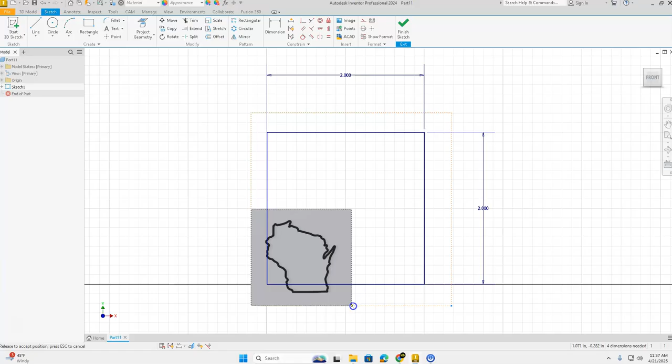Now my image is a little bit too small for my 2 inch by 2 inch area. In order to make it larger, I'm going to go to the bottom right hand corner, find the red dot, click and hold down with my mouse, and stretch this a little bit bigger. Once I get it enlarged, I can move it and shape it to the size that I want. Make sure when you're sizing this with the red dot that you're pulling straight out at a horizontal line. If you end up tipping, that's going to tip your graphic as well, and that's okay if that's what you want, but I'm going to make mine come out horizontal and keep the orientation straight up and down.

Next, I have this the size that I'm going to be tracing it, so this rectangle that we created, I'm going to right click and select delete. I could also click it and press delete with the keyboard. Either way is fine. I'm just going to get rid of that rectangle that we drew so it doesn't become confusing for us.

Now, in order to trace around the contour of my shape, I'm going to use a new tool for us, which is called a spline tool. I'm going to come up to my Create section in my ribbon bar, and underneath the line icon there's a line button. I'll click on the line button and go down to the second one down, which is Spline Control Vertex, and click to select it.

Before I start tracing, I want to use the zoom wheel on my mouse in order to enlarge this on my screen so that tracing is going to be a little easier for us.

Okay, that looks pretty good. Next, with my spline tool connected to my mouse, I'm going to start in one of the corners. I like starting in an outside corner or an inside corner, so I'm going to start down here in the bottom right, click, and come up around and start going around the contours.

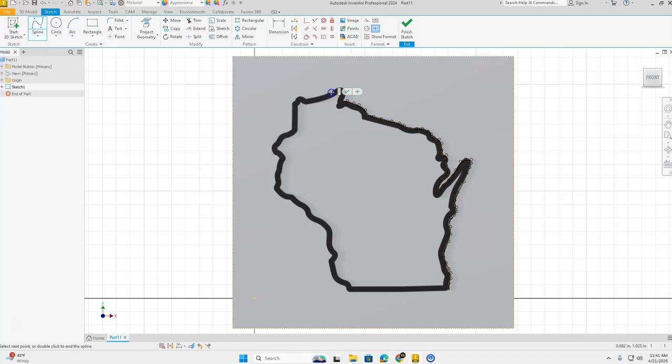Okay, it's just going to take us a second to go around this image. It's a lot of clicking, and looks like I'm going to have to start trying to move my little glyph that keeps following me around, and move him out of the way. He doesn't have to go far, just out of the way enough so we can find the next shape on our image in order to trace it.

Nope, gets in the way again. Not a big deal, just something we have to get used to. Mr. Bowen and I looked pretty hard and long to see if that was something we could make disappear or fade out after a little while, but this is the best we could come up with for you.

Keep moving him out of the way if he gets in the way. Usually it's only on one section of your drawing that you're tracing where you need to keep moving that glyph out of the way. Sure seems long when you have to do it though.

It does get a little annoying after a while, but it's just something we have to deal with.

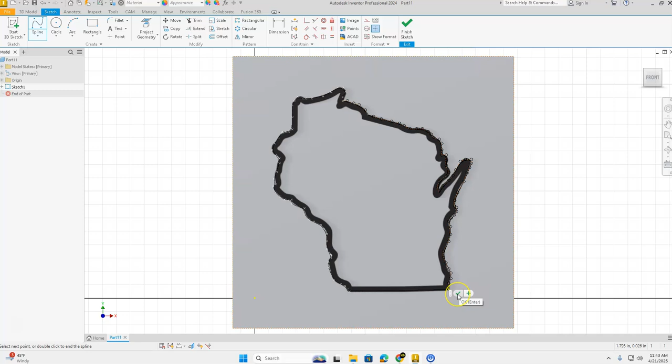Now once I have that finished, this would be the time for the green check mark to click OK, which ends my spline tool and puts it not connected to my cursor anymore. So I can see my spline going all the way around there. Here's a section that I had left off, and there's another one. I started making green dots so I could end up closing that shape off.

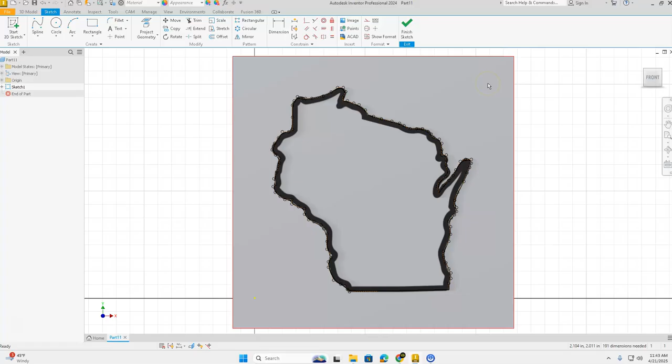Okay, now that we have that shape created, I'm going to select my graphic, click the area in the background here, and press the delete key on the keyboard, or you can right click and choose delete as well - both work. There I have my graphic going around, there's my splines, looks pretty good. And I'm going to click the green check mark to finish the sketch.

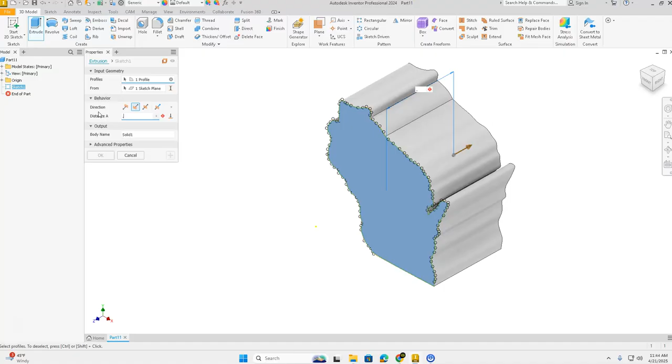Click home in your View Cube to zoom out, and now we're going to extrude this shape. Click extrude, and flip the direction so the orange arrow goes away from us instead of towards us. Change the distance to 0.125, and click OK. So it's an eighth inch thick.

That looks great. Next, we want to create a space for the magnet to go into. We're going to put the magnet on the back of our part, so in my View Cube I'll click the top right corner. I can see the word 'back' now, so I'll click it. Now I can see the shape from the back. I'll come up to the ribbon bar, take a 2D sketch, and place this on our back.

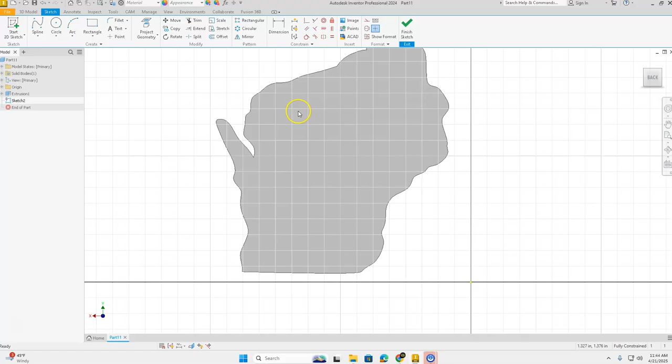I'm going to zoom in just a little bit. Now the magnet is circular in shape, so I'll use my circle tool to create that spot for the magnet to go into. On the gray area, which is my part, I'll click and stretch out a circle. The diameter is going to be 0.33 - that works well for our magnets - and press enter on the keyboard.

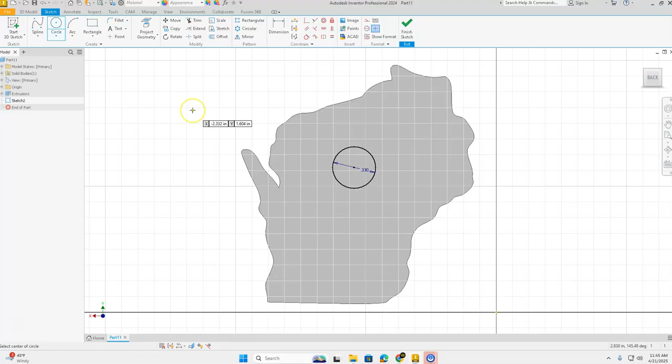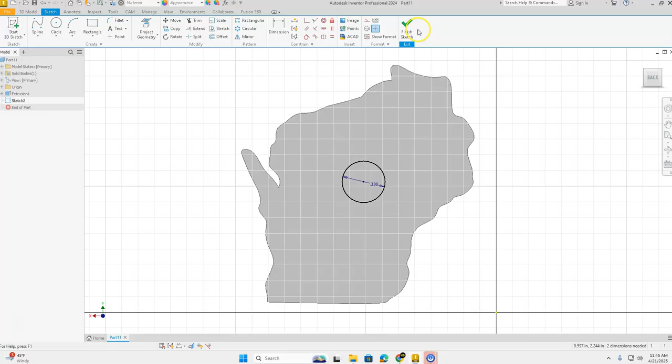Press the escape key to let go of the circle tool. I'm going to grab the center point of that circle and position it somewhere in the middle of my 3D printed part, with lots of room all the way around that circle shape. Now I'll click the green check mark to finish sketch.

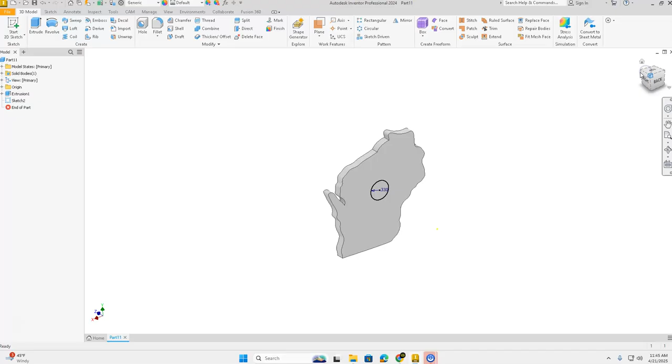I'm going to go back to my View Cube and click the top right or top left hand corner. Don't click home, because that will put you back on the front view - see, we lose our magnet shape. So I'll rotate that back around again. Click the top right or top left corner, and now we're going to extrude that circle.

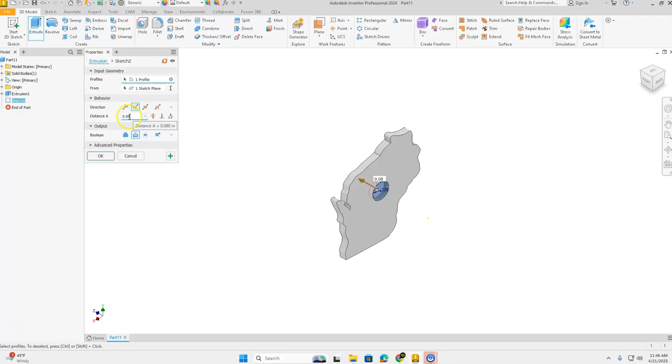You can see it's coming out towards us, so I want to flip that direction around. I want to change my distance to 0.08. I'll make sure the cut section is selected and my flipped area is selected, with 0.08 for my distance, and click OK. So right now I have the circle pocketed out for my magnet to go into.

I have the shape traced. This looks pretty good. I'm going to go up to the orange file icon in the top left hand corner of my screen and go down to Save As. I'll put this into my H drive, and I'll call this Your Last Name, then 3D Printed Magnet.

Once you have 3D Printed Magnet for the title, make sure you're in your H drive. We're going to click Save from here. Click the Save button.

Once it's saved, we need to get into a file format that the 3D printer is going to read. Come up to the orange file icon, top left hand corner, slide down to Export, and go to CAD format. Let me do that one more time: orange file, slide down to Export, and on the fly out menu, click CAD format. Still in our H drive, still with the same name, change this to an STL file - it's the second one from the bottom. So I have STL file, my file name stayed the same, I'm still in my H drive, and click Save.